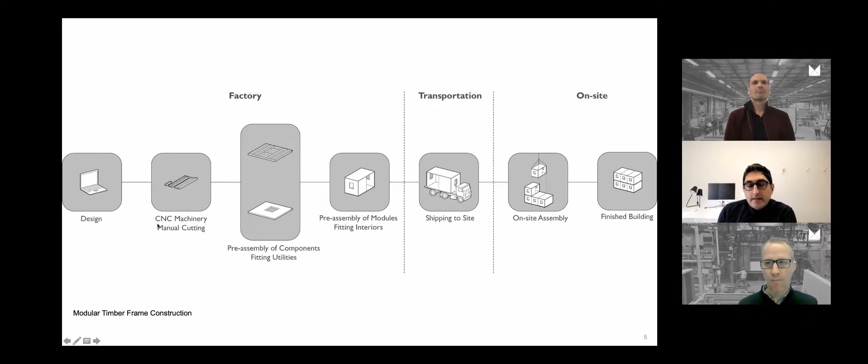As the material choice, I've focused my research on timber, and I specifically looked at modular timber frame construction as the offsite construction method. This slide illustrates the main steps of a typical construction process for multi-story modular timber frame buildings. First walls, floors and ceiling panels are prefabricated individually. Then they're put together, finished, transported to the construction site, and assembled into the finished building. It's also important to note that in the mainstream, the digital chain mainly stops at the prefabrication of timber elements and parts, and their manual assembly.

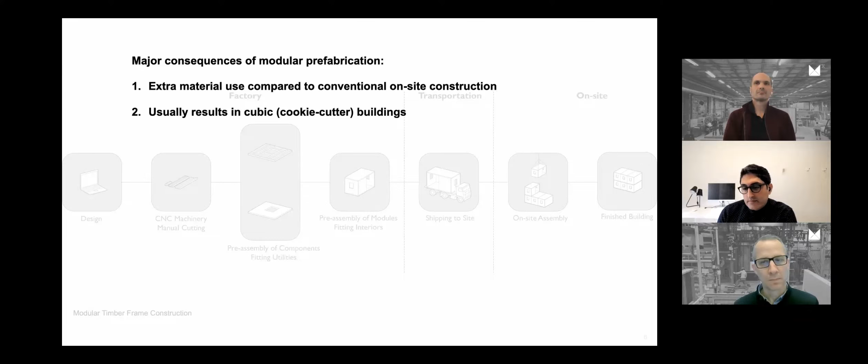The second consequence is that modular timber frame construction is conventionally associated with standardized modules and usually results in cubic or cookie-cutter buildings. This approach substantially limits formal, typological and tectonic possibilities of modular timber frame construction. So to address this, I asked the question: how can this dominant paradigm be challenged by an assembly-driven computational design method, coupled with robotic assembly techniques of bespoke timber frame modules?

In order to address these challenges, I defined three main research questions for my doctoral research. First, how to rethink the design, planning, and construction of modular timber frame buildings through an integrated computational design and robotic assembly process. Second, how can robotic assembly be effectively implemented in the design and fabrication of timber frame modules, and how can it expand the design space and add flexibility to the overall prefabrication process so we don't end up with standard, cookie-cutter buildings.

And third, how to rethink modularization of timber frame buildings, capitalizing on an integrated computational design and robotic assembly process in order to minimize the required duplication of structural material, while at the same time adding design flexibility. So these were the three main research questions of my doctoral research.

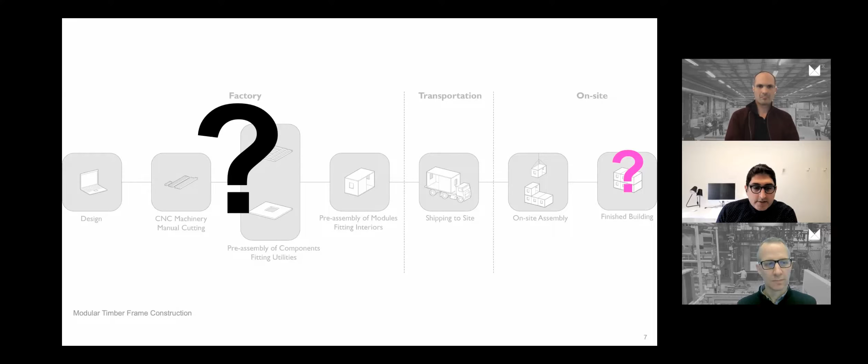To investigate these research questions, I proposed a new design and construction process illustrated in this figure. The proposed process targets off-site robotic assembly of bespoke timber frame modules, coupling computational design, material processing, and cooperative robotic assembly. Then finishing, and then transportation of the modules to the construction site and putting them together to construct the building.

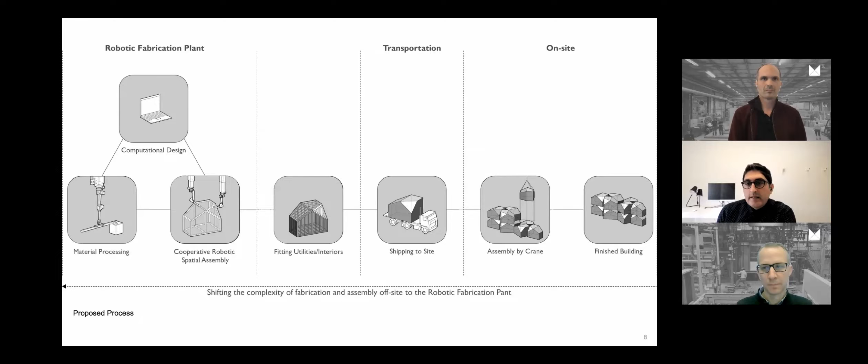What's important here is that this process is intentionally designed to shift the complexity of fabrication and assembly to the digitized environment of the robotic fabrication plant, while mounting remains simple and straightforward. And it's because you have a lot of control over the process. You have climatic control and sensing and different types of controls. But there is also a big challenge here.

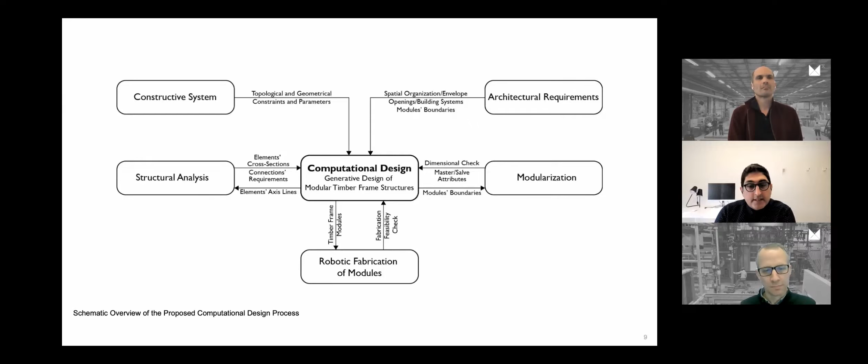The proposed process requires a new fabrication-aware and assembly-driven computational design method, capable of integrating and satisfying an expanded set of interrelated functional, topological, geometric, and quantitative constraints, as shown in this slide, and facilitating seamless digital workflow for robotic assembly of non-standard modular timber frame buildings. This is because these new machines and construction processes require very specific data, and also come with very specific constraints that need to be addressed in the design space in order for the building to be feasibly manufactured.

The developed computational design method and workflow, seamlessly linking generative design and robotic assembly of bespoke timber frame modules, enables the algorithmically generated modules to be fabricated through a digital production chain and a just-in-time fabrication process, as shown in this slide.

The main steps of this just-in-time fabrication process are a robot picking a raw timber element, cutting it in cooperation with a CNC saw, milling and drilling it, and then placing the element on the assembly stand spatially. And a human connects the timber element with screws. So it also provides a good scenario for human-robot collaboration.

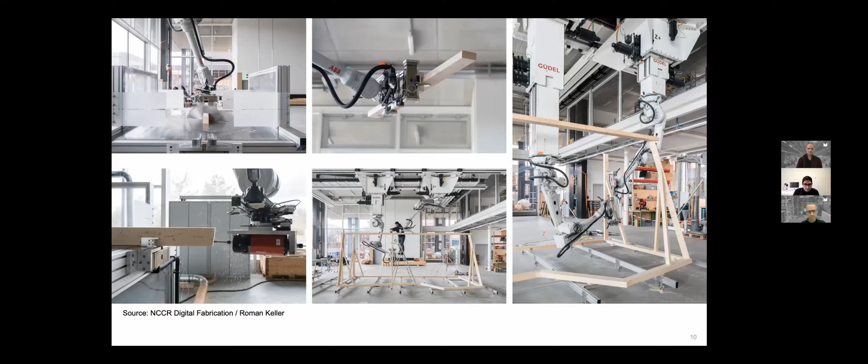As Ryan mentioned, I worked on the DFAB House, and this process was implemented in the design and prefabrication of the timber frame structure of the DFAB House. DFAB House is a 3-story building. The first floor includes 3 novel concrete construction technologies: mesh mould, smart dynamic casting, and smart slab. A 2-story timber frame building which sits on top of the smart slab is the case study of this research. The facade of the timber frame structure is a novel translucent facade system.

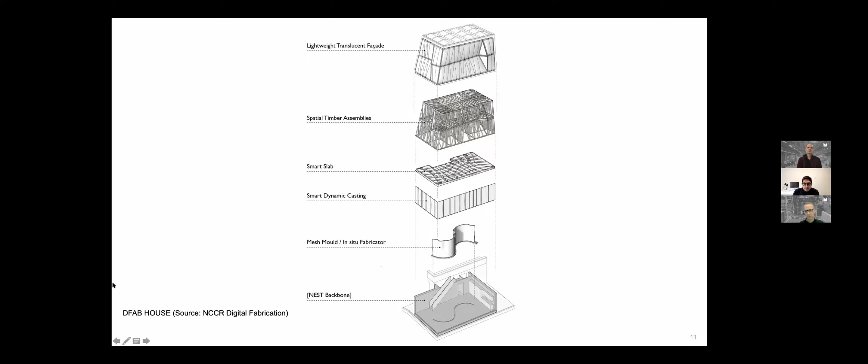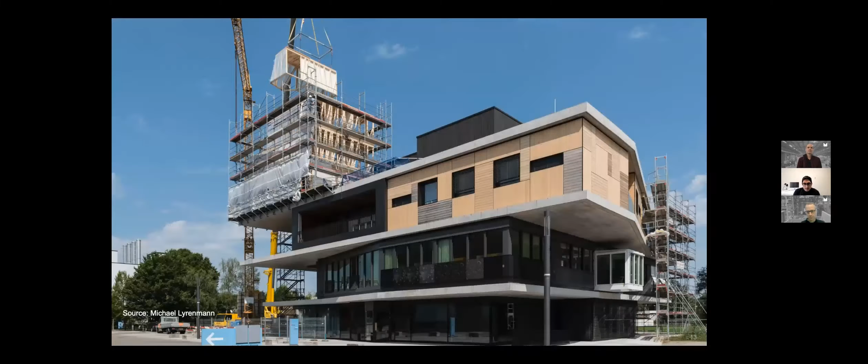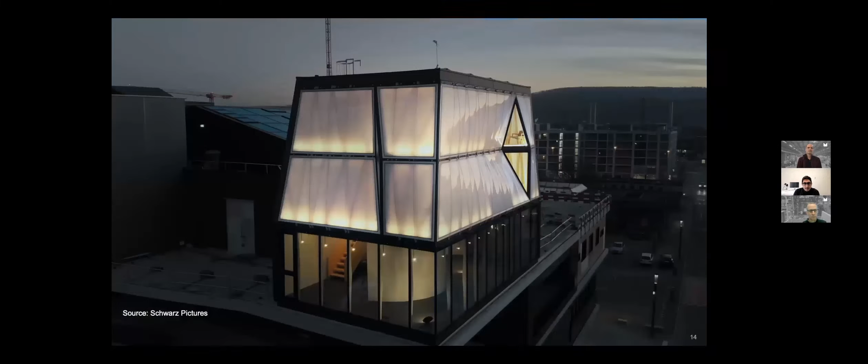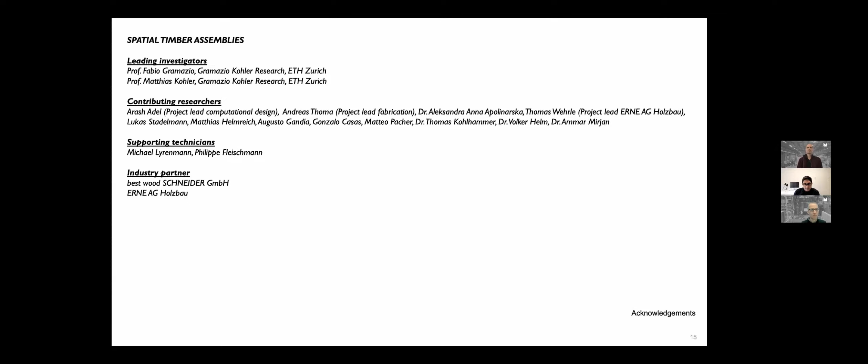I need to show this slide. This is the acknowledgement of the people who were involved in the project, because it was a highly interdisciplinary and collaborative project. Okay, that was just a brief overview of my doctoral research.

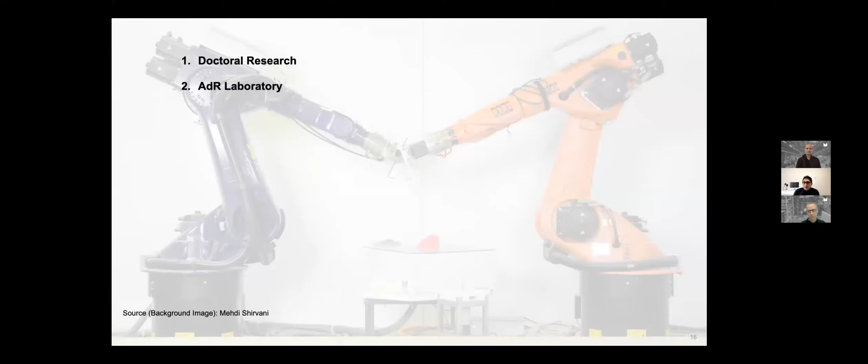Here I'm going to switch gears and briefly talk about a laboratory at the University of Michigan called AdR. We launched AdR in January 2021, so it's about 2 months old right now. AdR is an interdisciplinary laboratory for advanced research in architecture, computational design, and robotic construction. Our core research topics are fabrication-aware and assembly-driven computational design methods and tools, and building-scale robotic timber assembly. I put timber in brackets; that's our main focus, but we're also working with different materials.

Then a big topic that we have just started, and we're writing a big grant on, is human-robot collaboration in the context of design and construction: how the future of construction will look, and what are the opportunities and challenges for transferring this knowledge to fabrication plants and construction sites. And third, we also wrote a grant for this, is design for assembly, disassembly, and reuse, circular economy, because of the constraints of the material resources that we are facing right now.

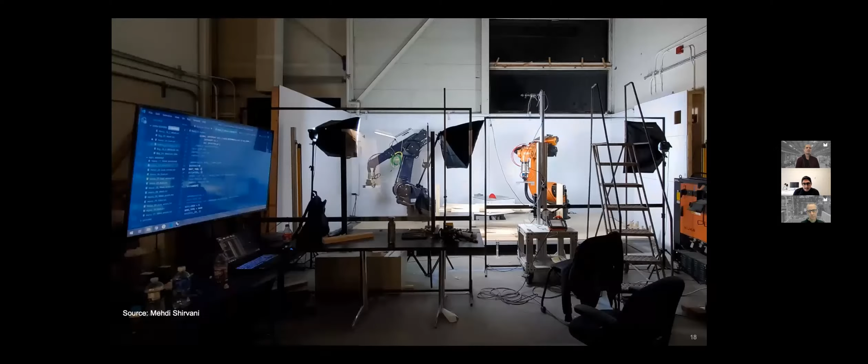This is my last slide. This photo shows one of our cooperative robotics cells in action a few days ago. It's messy, yet it illustrates the work in progress. My students and assistants were developing a workflow and fabricating a timber sub-assembly.

Thank you. Thank you so much, Arash. We'd love to have a little discussion here. I appreciate you presenting, and this provides a good background. Ivan, do you want to start off the questioning for us for Arash?

Yeah, Arash, really great presentation. I really appreciate it. And I really appreciated the clarity of the diagrams in terms of the control group of sort of timber frame, volumetric, modular, as compared to your investigation and the work at ETH. So maybe just to start a little bit, I think that the diagram you showed is quite typical in maybe European volumetric modular. Unfortunately, in the US, where we have a much larger industry and a lot less acceptance of offsite than we do in European countries, including Switzerland, in terms of market share, we don't have that kind of automation. So even the CNC pre-cutting process is almost a dream.

And so maybe I just ask a little bit, because I think that's the goal of bringing you into, you're bringing your really cutting edge research into this context and trying to have a conversation more within the industry at large. How do you see those kinds of persistent barriers to the adoption of automation? And is that something you're studying? Is it something you're interested in looking at, in addition to looking at really what could be the cutting edge of the technological side of the investigation?